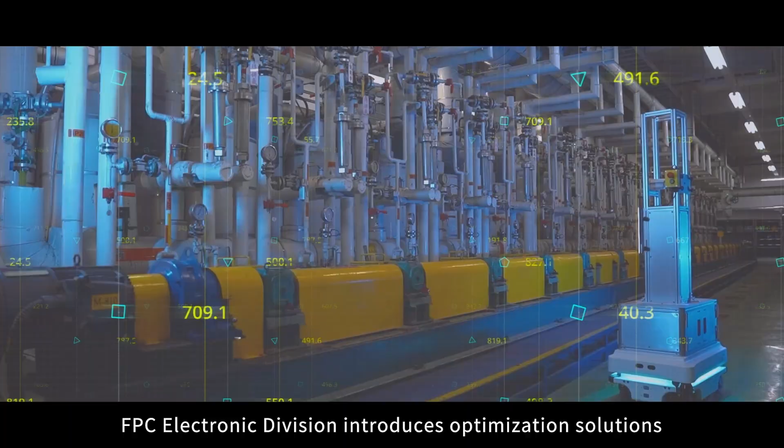Stepping into the era of the Industrial Revolution, FPC Electronic Division introduces optimization solutions aimed to accelerate digital transformation in fields including anomaly prediction, production processes, and other manufacturing-related control systems.

From IoT to 5G, our division is committed to practicing state-of-the-art technology to support customers into smart manufacturing and embrace the future with AI.

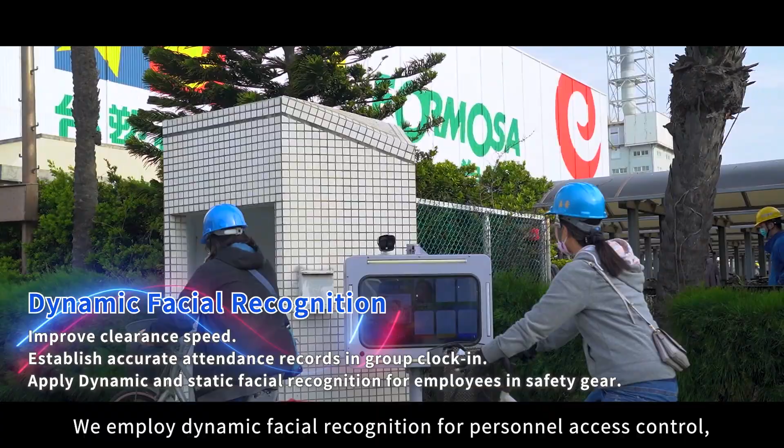Dynamic facial recognition. We employ dynamic facial recognition for personnel access control, integrating mask detection and temperature measurement functions to enhance the security of access management.

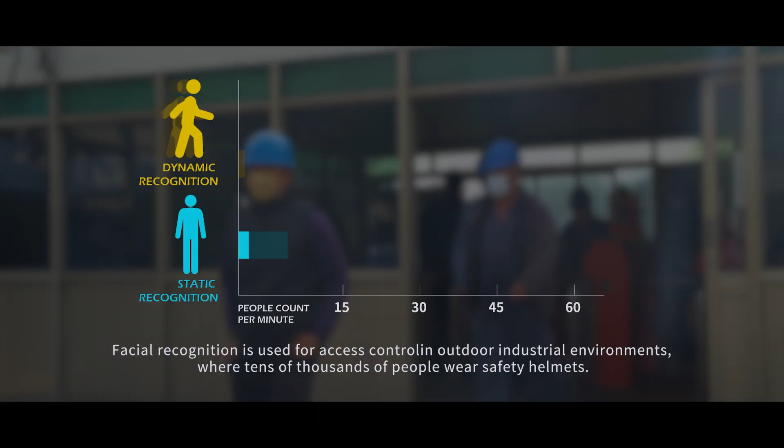Formosa e-commerce, a fully digitalized and integrated platform, helps to increase productivity, efficiency, and performance levels in the production and marketing process, which further enhances customer experience and satisfaction to optimize the order-to-ship (OTS) process.

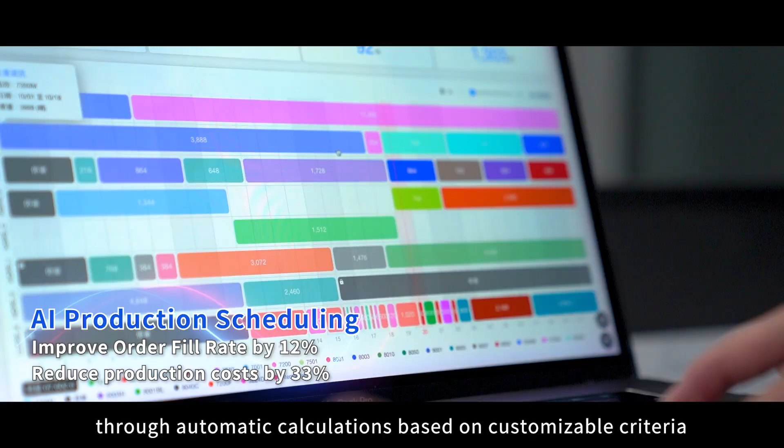AI production scheduling models guarantee optimized outcomes through automatic calculations based on customizable criteria, including order fulfillment rates, costs, resource allocation, product changeover rates, and more.

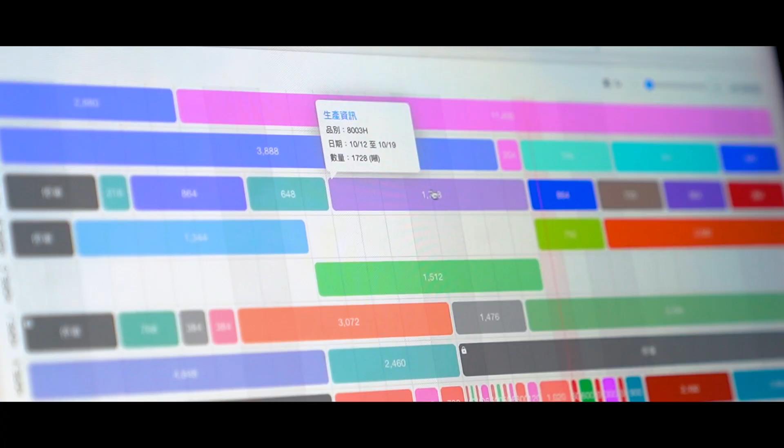Distributed Control System, DCS, integrates various automation systems to provide comprehensive solutions for factory management, operational control, and process optimization.

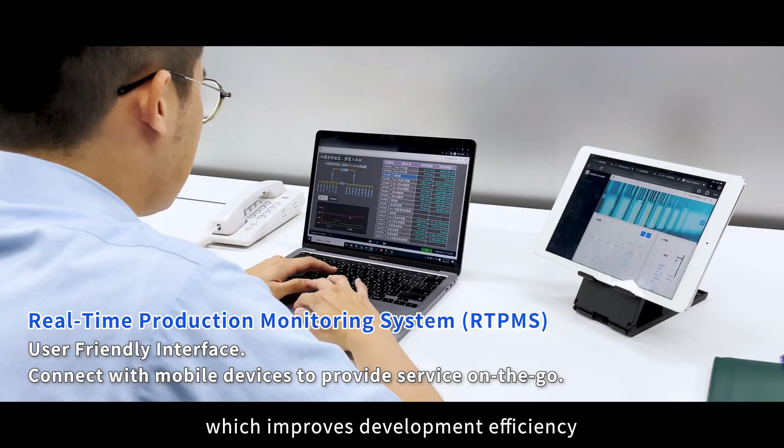Real-Time Production Monitoring System, RTPMS. Upgraded RTPMS eliminates the ASP.NET framework and implements the CI/CD mechanism, which improves development efficiency and gives more flexibility in customization.

Process optimization. Through pinpointing the disturbance signs and analysis of production data to achieve early fault detection and diagnosis.

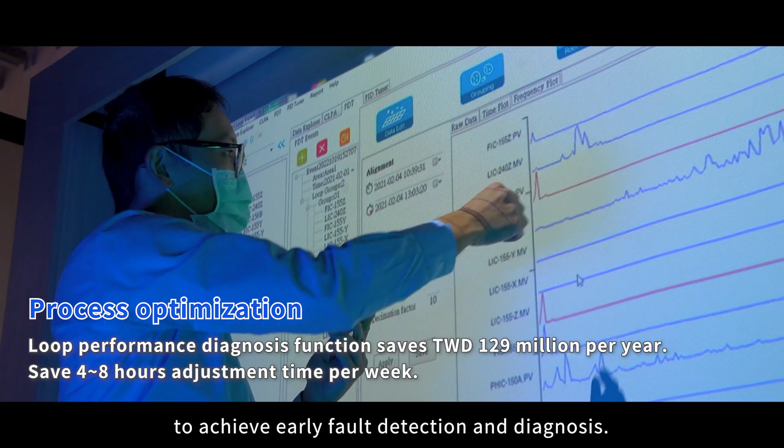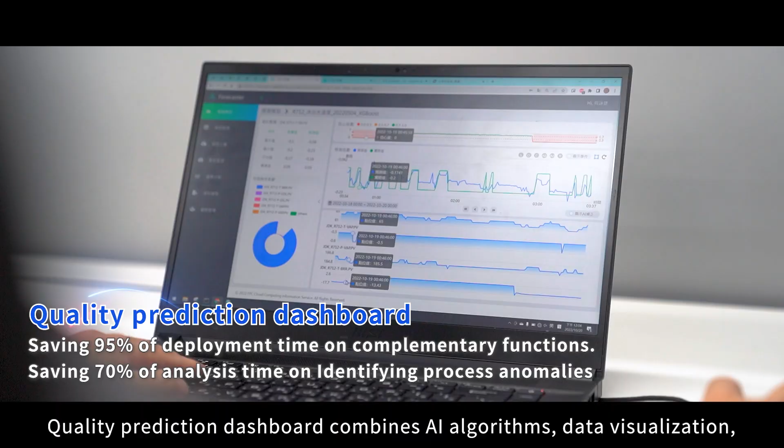Quality Prediction Dashboard combines AI algorithms, data visualization, and real-time data to enable easy monitoring of production, quality, and inspection processes with low-code and no-code.

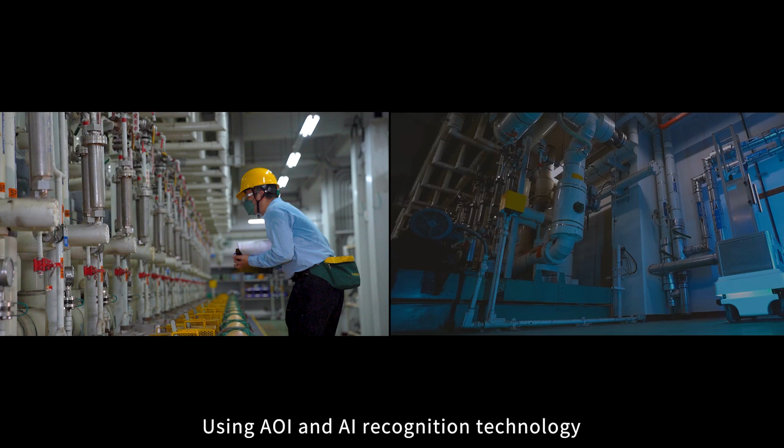AOI Meter Value Recognition. Using AOI and AI recognition technology to replace manual inspection achieves consistent and accurate meter readings, minimizing errors and accident occurrence.

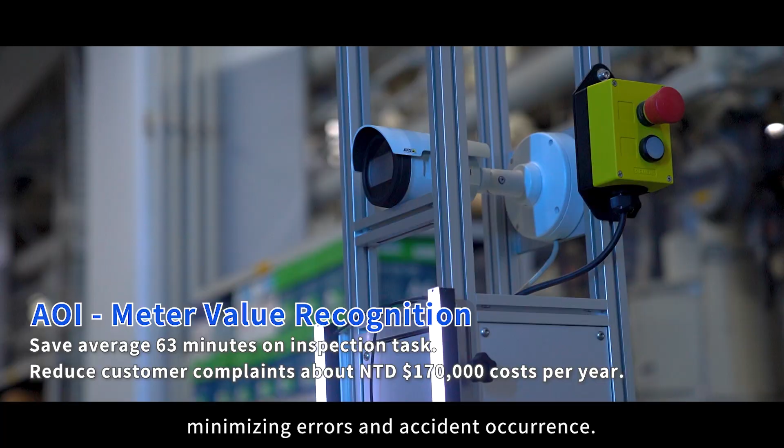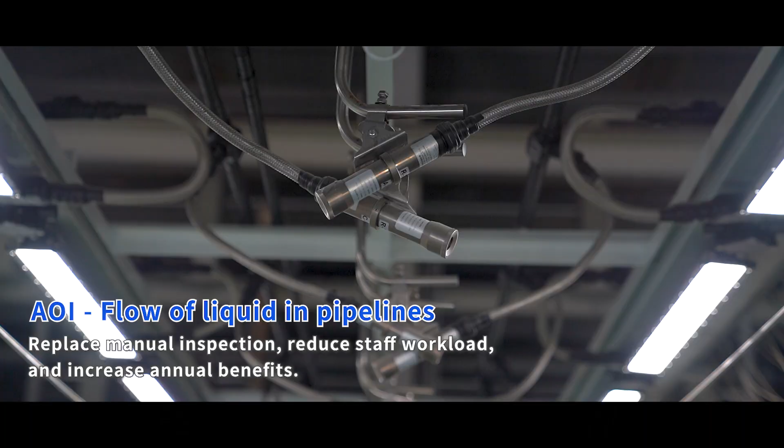AOI flow of liquid in pipelines. AOI replaces high-risk sampling operations.

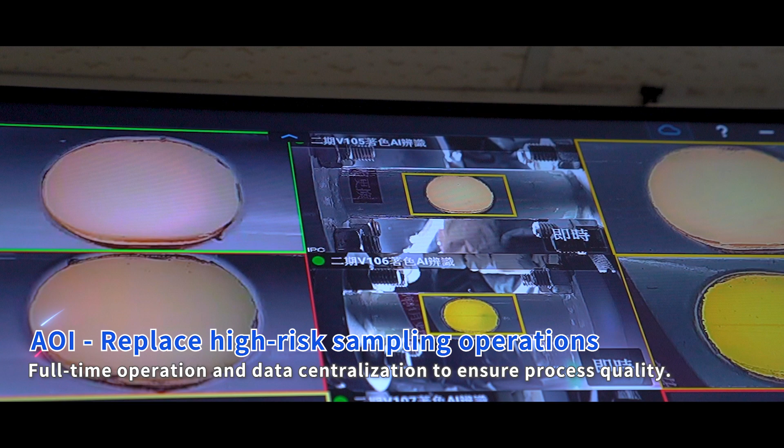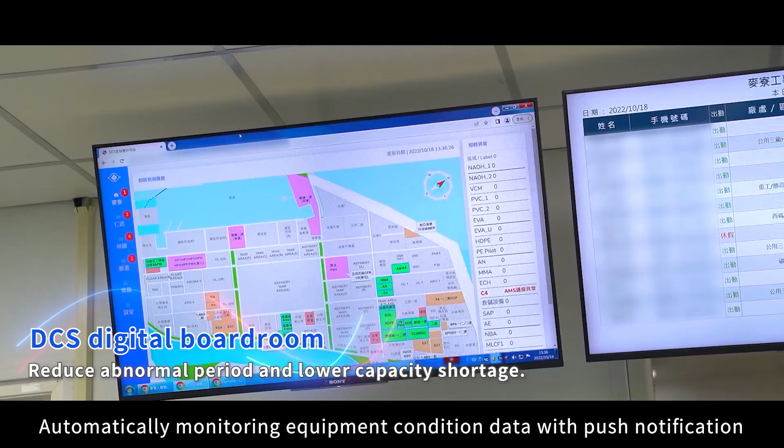DCS Digital Boardroom. Automatically monitoring equipment condition data with push notification, which improves troubleshooting efficiency and reduces downtime.

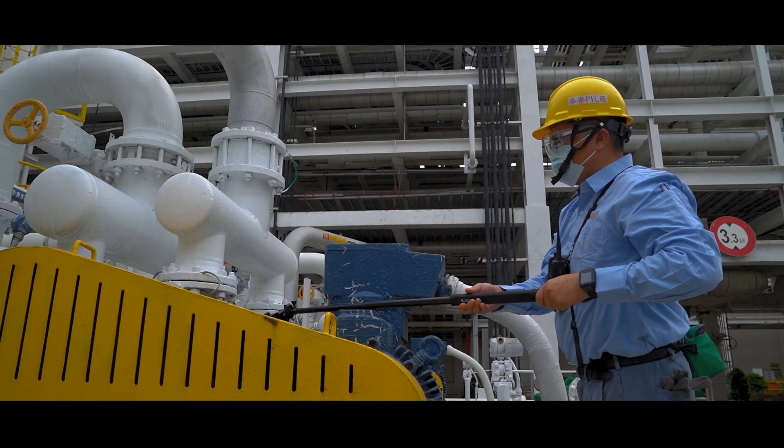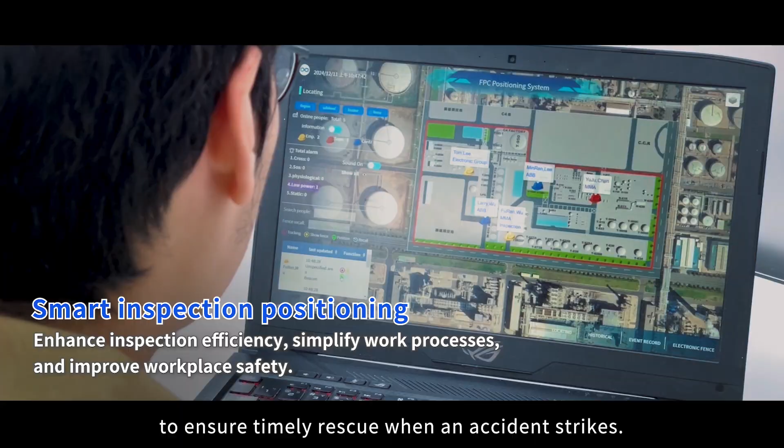Smart Inspection Positioning. Geographic Information System with wearable device gathers real-time videos and tracks personnel positions to ensure timely rescue when an accident strikes.

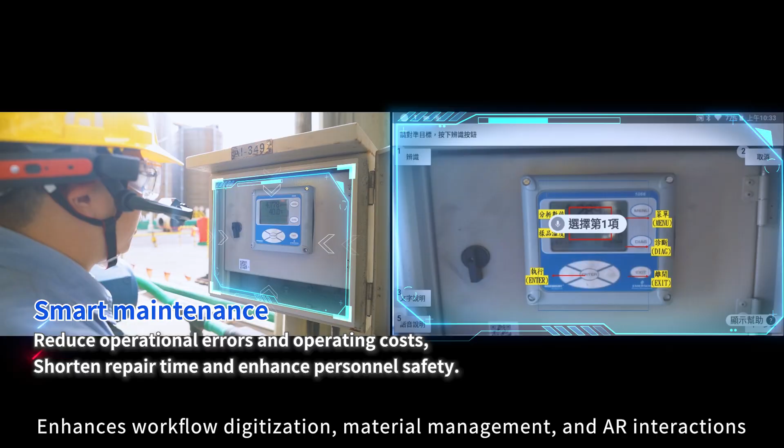Smart Maintenance enhances workflow digitization, material management, and AR interactions during the maintenance process to improve efficiency.

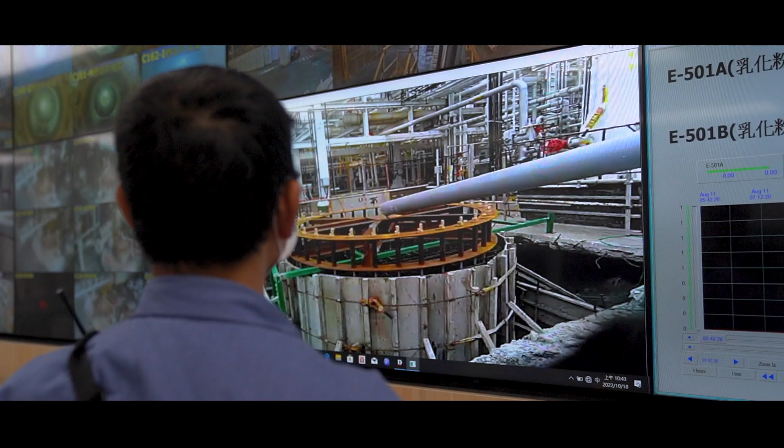Remote Guidance. Instant communication provides remote assistance through on-site witness.

Smart Supervision combines camera and AI technology with real-time monitoring and instant reports for unregulated activities to support workplace hazard control.

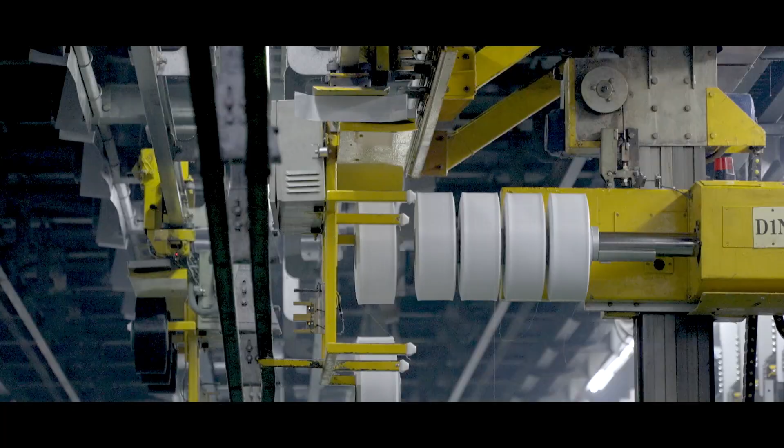Automatic doffing system. AI scheduling model enables vertical integration of the production sites, finding the best possible route based on operating conditions.

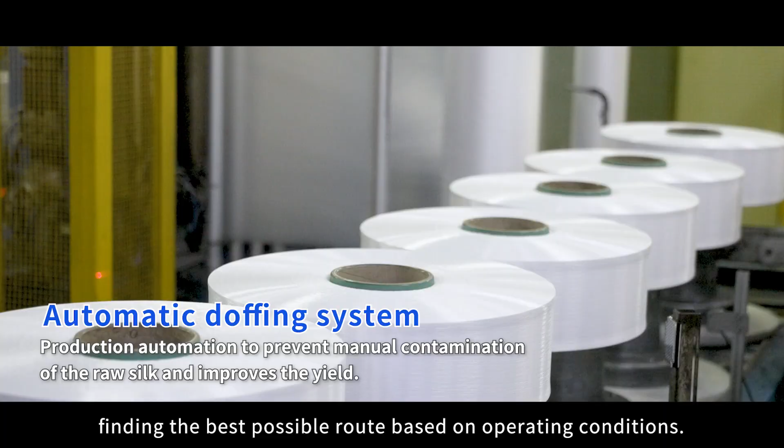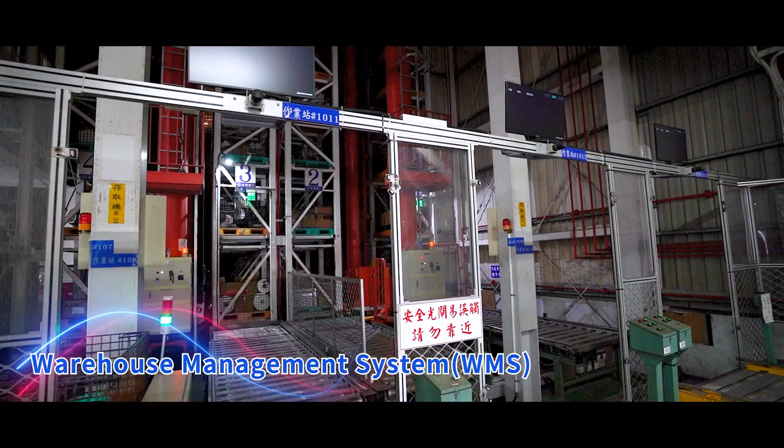Warehouse Management System, WMS. Combined with varieties of automatic devices through IoT technology, WMS improves efficiency and enhances overall warehouse management processes.

AOI Warehouse Utilization Management. Using AOI technology to identify unused or underutilized space and make informed decisions to optimize space allocation.

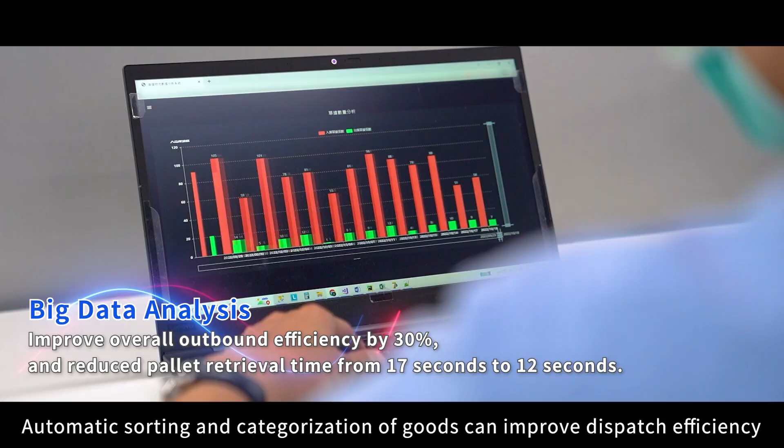Big data analysis. Automatic sorting and categorization of goods can improve dispatch efficiency and reduce the power consumption of automated retrieval machines.

AOI inspection of package seal.

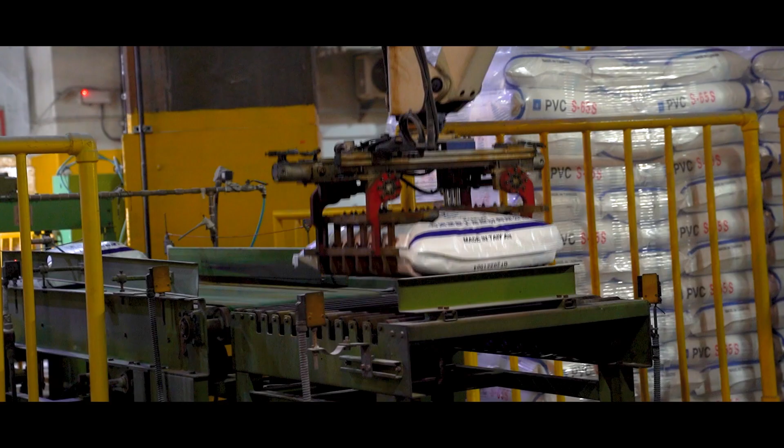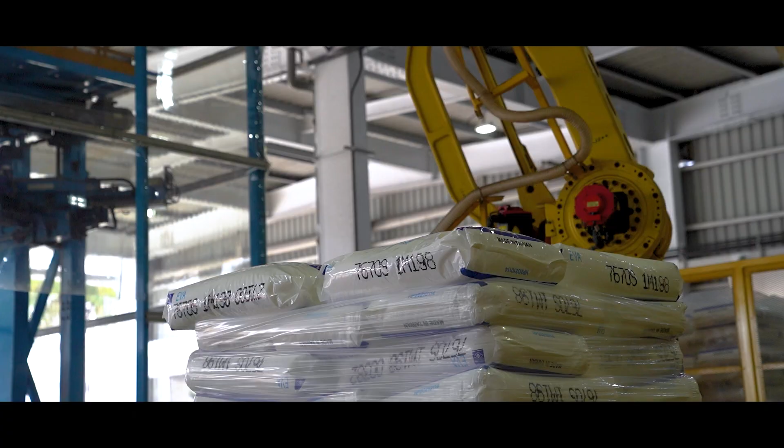Automatic detection of pallet height, followed by automatic unpacking by robotic arms, enables fully automated operations from automated warehousing to shipping.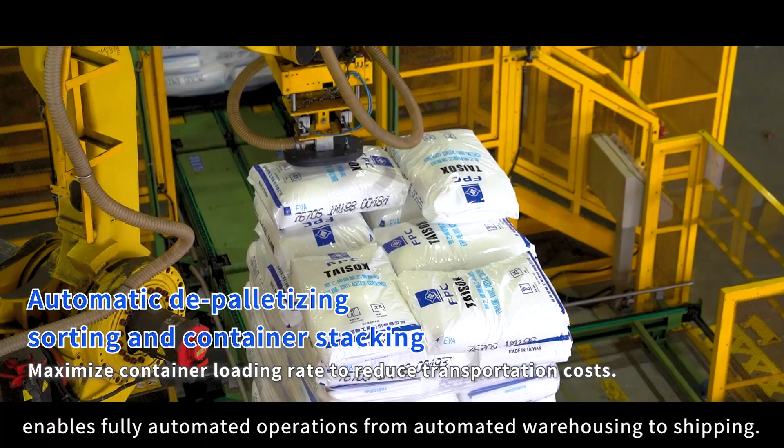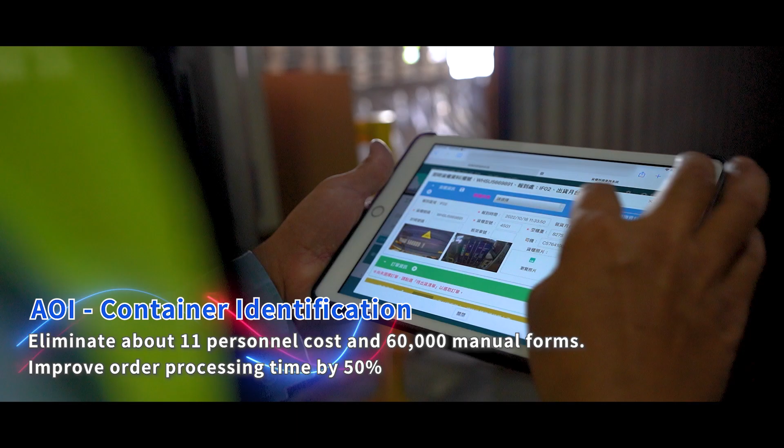As the world evolves every day, our unwavering passion for driving innovation and relentless pursuit of excellence will never stop. We will continue to deliver comprehensive solutions to our clients, making complex operation and process simpler and smarter.

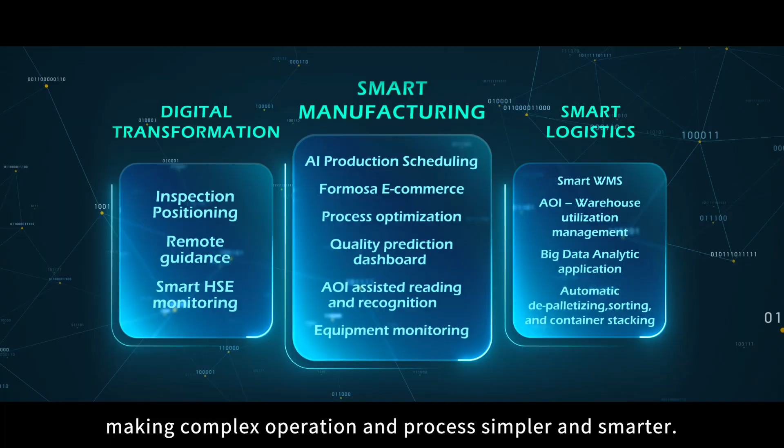We are FPC Electronic Division, your best partner on the journey into the Industrial Revolution.